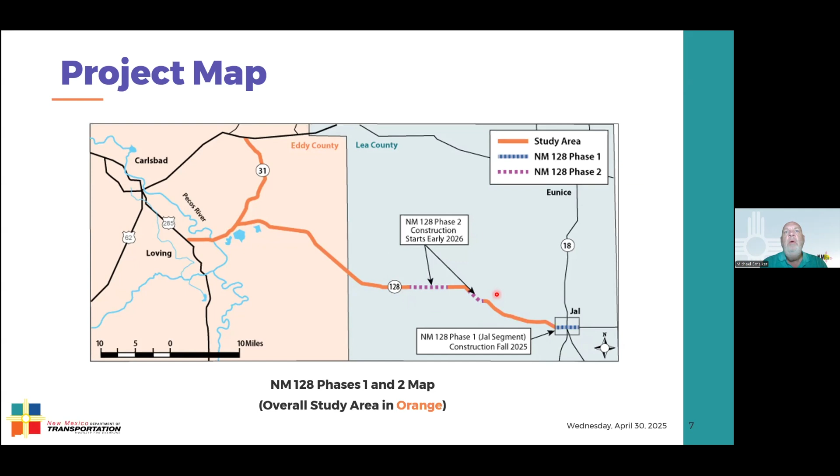We can go ahead and go to the next project, and these are going to be our future projects that we can talk about on the next page. So on the next map, as you can see in the middle there, it's kind of the teal blue color, we have New Mexico 128 Phase 3 design.

What we're doing here is we're going ahead and capturing the WIPP intersection, and we're actually capturing Orla and Buck Jackson. So we're actually going to build Orla and Buck Jackson, and tie that together with a divided highway and improve those intersections, because we know that Orla and Buck Jackson are probably a couple of your major intersections along the corridor.

What our goal is to do is finish up Phase 2, and then we're going to roll directly into construction for Phase 3 of these other intersections, so they're not all sitting up on top of each other.

The other project is not funded yet, but that's New Mexico 31, Phase 4. That one actually goes from milepost 0.5 to around milepost 8, at the New Mexico 31-128 intersection. That does not include the bridge over the Pecos, but right now that's anticipated to be a 4-lane divided highway for that portion there. So we're looking at that one as we get funding for it, but that one will be out in the outer years at this time because it's not currently funded.

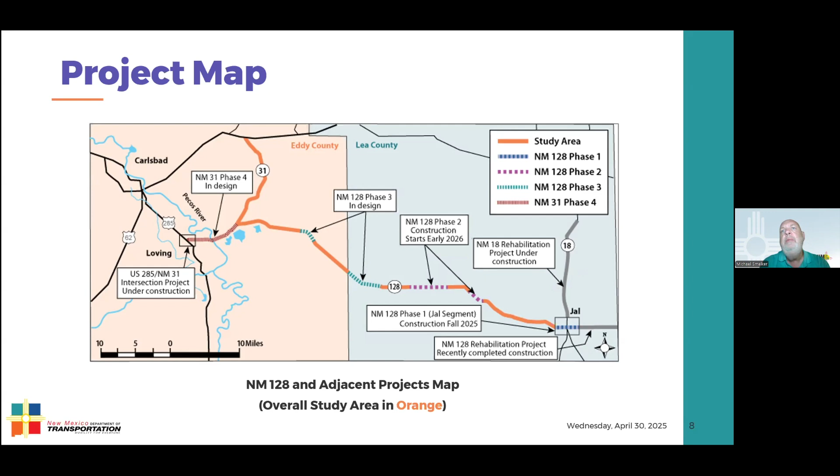Thank you, Michael, and good evening, everyone. My name is Andrew Sutliff. I'm a highway engineer and project manager with a firm called WSP, and our team has been working with NMDOT for the past few years on the NM 128 improvements projects.

So believe me when I say I understand it's been a long time coming, and we're really excited to be here with you tonight to give you this update and to say that, as Michael mentioned, these projects are going to construction very soon, these first couple phases.

So if you've been following the project, you might remember a couple years back we were on a meeting similar to this virtual public meeting tonight, and that was to review the study that was performed on the corridor. We did develop a study that evaluated some issues and recommendations, and I think it's worth going over those briefly before jumping into the first couple phases.

I do understand that it might not take an engineering study to see these big issues happening on the corridor. If you are on this meeting, you're likely driving through this highway, or maybe you know friends or neighbors that do.

And there are a lot of crashes happening. When we worked through the study, there was a 6-year period that we evaluated, and over 700 crashes were documented during that period through this project area. A lot of the types of crashes we found were head-on collisions, T-bones, overturns, and rear ends, all of which were resulting in over a quarter of them leading to deaths or serious injuries.

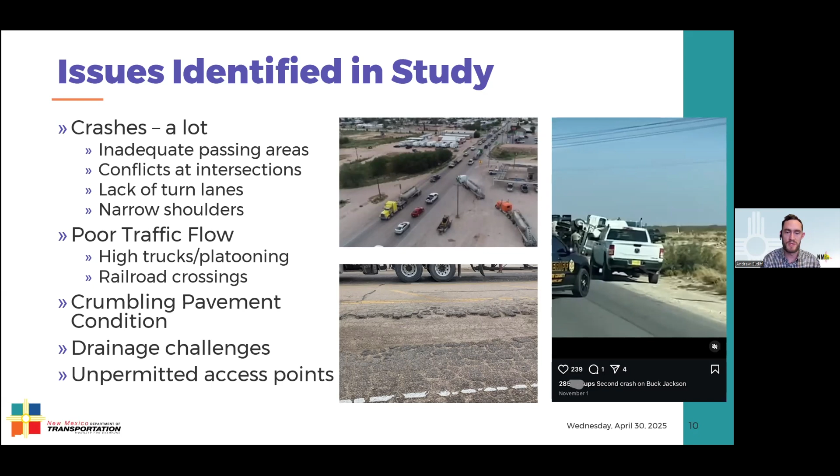Moving forward into the recommendations from the study: adding turn lanes with the proper length so that large vehicles traveling through this highway can safely slow down and make their turn. Also adding a median for separation of the eastbound and westbound travel directions, which is really important for a few reasons we'll touch on later. Also, of course, providing passing areas and additional capacity.

This might look different in certain intersections, or whether you're in the urban section of the city of Jal versus the more rural portions of the corridor. Michael mentioned that in some cases this is widening to a 4-lane divided highway facility, spreading out traffic to allow more space for safe turning maneuvers. Other recommendations from the study were to widen the outside shoulders, add rumble strips, and add lighting at major intersections, especially the conflict points.

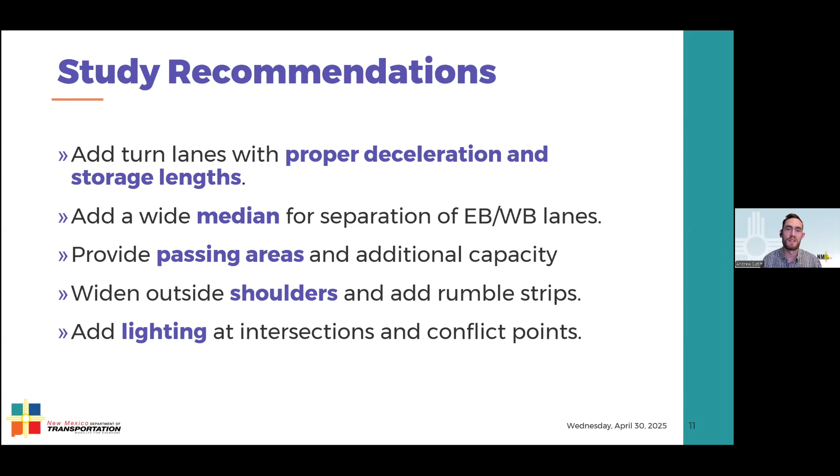It's also worth acknowledging that this highway is a major supply route for some key industries, not only for New Mexico but for the United States as a whole—one of those being oil and gas, but also potash production. NM128 is an alternate site route for the WIPP site, the Waste Isolation Pilot Plant. This gives context into the types of vehicles traveling through the highway, very large vehicles driven by perhaps your neighbors, friends, families, carrying valuable resources. We understand this is critical to provide safe and maintained highway facilities on NM128.

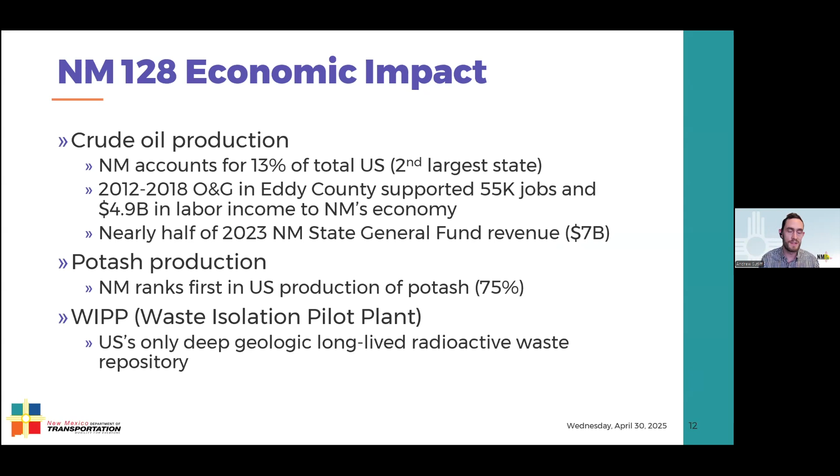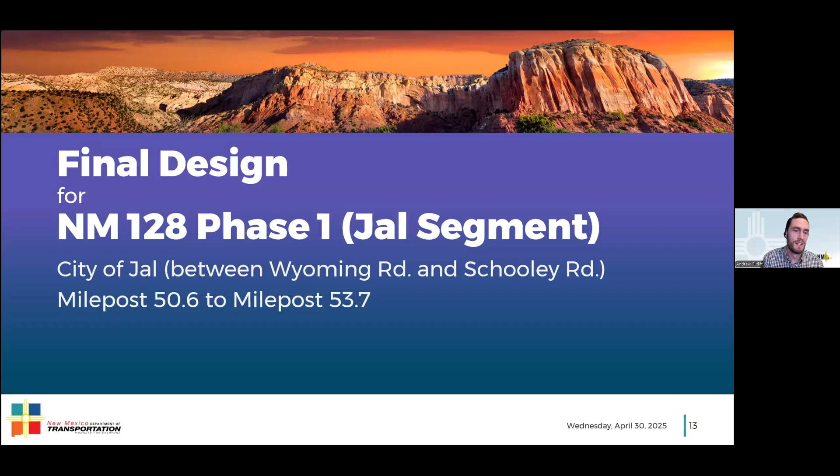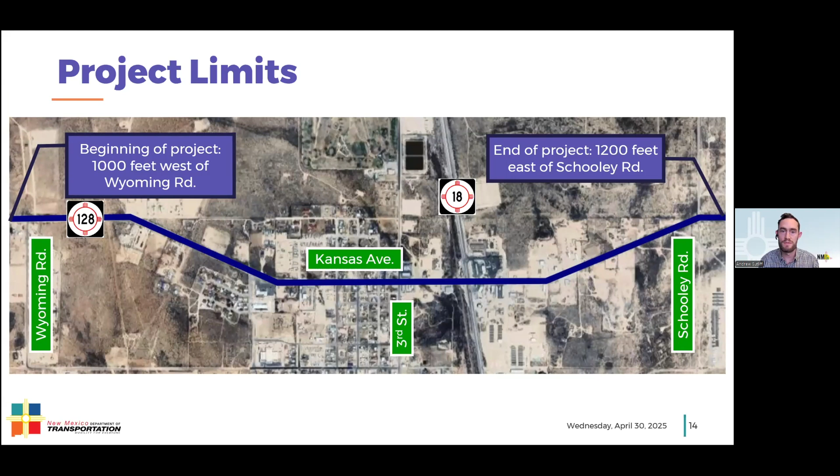That's a quick recap of some points from the study, but what we really want to move on to is the first two phases. Michael gave an overview of their status, but as a reminder, the first phase has completed design and is currently preparing to go out to bid in the coming few weeks. If there are any contractors on the line, please keep an eye out on NMDOT's bidding website for this project. It starts about 1,000 feet west of Wyoming Road and continues approximately 3 miles to the right side of the screen, 1,200 feet east of Schooley Road, through the city of Jal.

It doesn't show on the screen here, but we've added right turn lanes at key intersections and a widened section between 3rd Street and NM18 for left and right turn lanes. That's important because the project will be adding brand new traffic signals at the 3rd Street and NM18 intersections. Today it's just 4-way stops, and we believe those traffic signals, synced with each other, will make a significant difference ensuring smooth traffic flow through the city.

And cut down those travel times seen today. Some other improvements not shown on this image: there will be brand new street lighting throughout the project, sidewalks, and storm drain that will be installed. That storm drain will help collect any water ponding on the road, which we believe is contributing to the pavement crumbling over time. So we're going to get water off the road, and we'll have a brand new smooth pavement section.

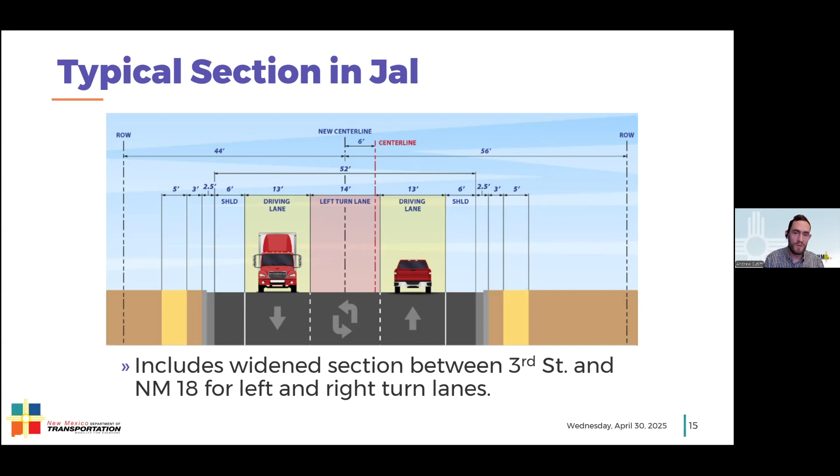Yeah, quite a bit of improvements in this project.

Something I'd like everyone to know is when the contractor comes on board, whoever the winning bidder is, there are requirements for them to come back to the public at the beginning of construction, and also whenever there are major phase changes or major pieces of work happening as part of the project. So you'll get notices, whether it's online on a website, radio, advertisements, or mailers. The contractor will be responsible for communicating construction progress. But we felt it was worth giving everyone a heads up on how this project may be constructed and where traffic will be anticipated to be.

So the first phase is shown on the screen, and this is where the contractor will build the north side of the roadway. Traffic will be shifted to the south side of the roadway, with one lane of eastbound and one lane of westbound throughout the duration of the project. This phase is really important because it's when the contractor will be constructing most of the new storm drain system, so we expect this may be the longest phase during the project.

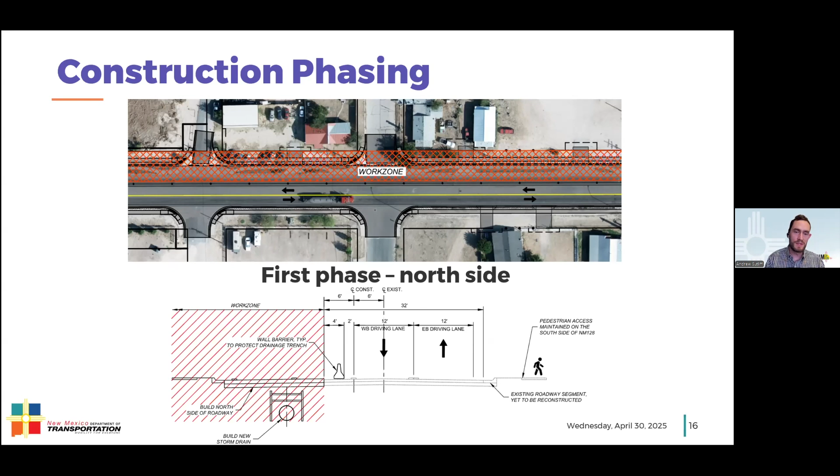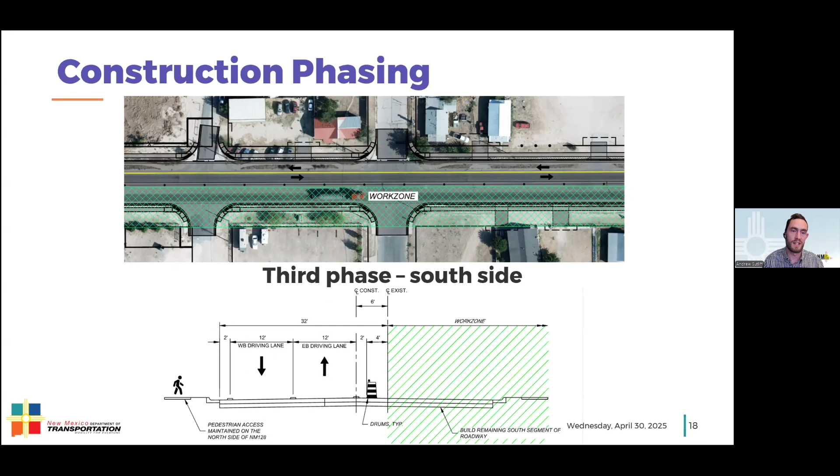Pedestrian access will be maintained on the existing sidewalks on the south side of the roadway. But as work progresses, you'll see on the next slide that the contractor will finish the north part of the road and move to the middle. That brand new pavement on the north side will be used for westbound traffic. Continuing to the next slide, the last phase is that the contractor will work on the south side of the road, and both lanes of traffic will be on the brand new pavement that has just been completed on the north side.

So something that may or may not have been apparent: since we are maintaining one lane of traffic each direction, the left turn lanes will be restricted except at these intersections: Schooley Road, NM18, 3rd Street, and Wyoming Road. This is really important, and it's not taken lightly.

As you can see, this picture on the right is an example of what that storm drain and general construction will look like. It requires a lot of space so the contractor can work safely and efficiently to construct this project quickly and safely, and also to keep construction equipment a safe distance from passing vehicles.

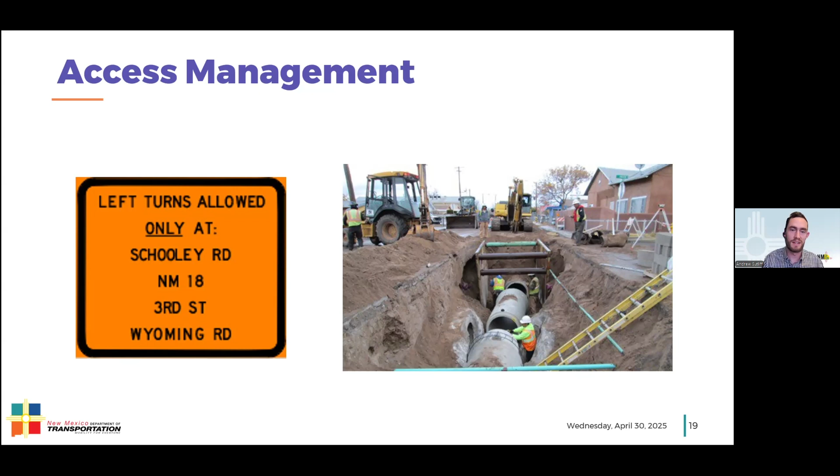Also, by being strategic about where these left turns are happening, it can cut down on backups. If someone stops in the middle of the road to try to make a left turn, it backs up traffic for everyone else. This was presented during the study phase, but it's worth the reminder that you might have to plan a slightly different route if needed. The contractor will make these turning movements signed very clearly, so you'll be able to see where you can and can't turn.

And again, they will let you know ahead of time when this happens. The next slide shows another piece we wanted to give a heads up about: there will be a portion during construction where the railroad tracks that cross NM128, just near the NM18 intersection, need to be reconstructed. In order to do that quickly and efficiently, that will include a complete but temporary closure of NM128 at the tracks. We're expecting this to take in the range of 3 to 5 days, and again this will be shared with the public prior to the railroad construction and closure.

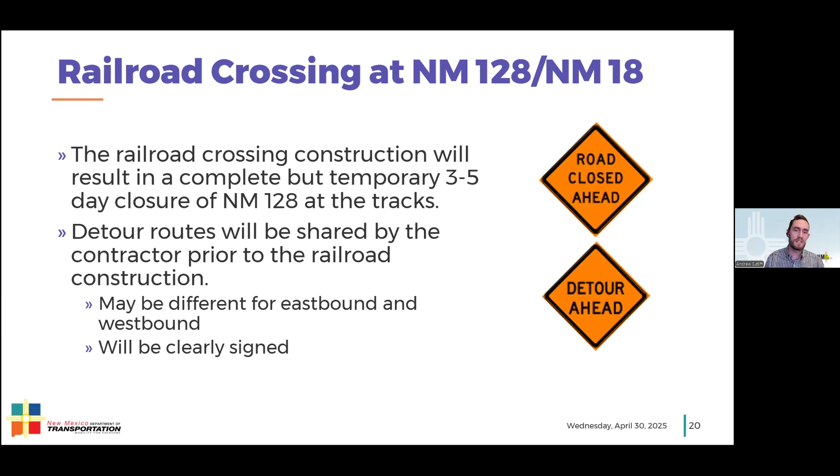The detour routing will be clearly signed, but it may look something similar to what's shown on the next slide, which is for eastbound traffic. That will be diverted up north on 3rd Street, past the Country Club, and then back down on NM18. Westbound traffic would be diverted a slightly different route: south on NM18, over to Merryman, and through the city streets to get back to NM128.

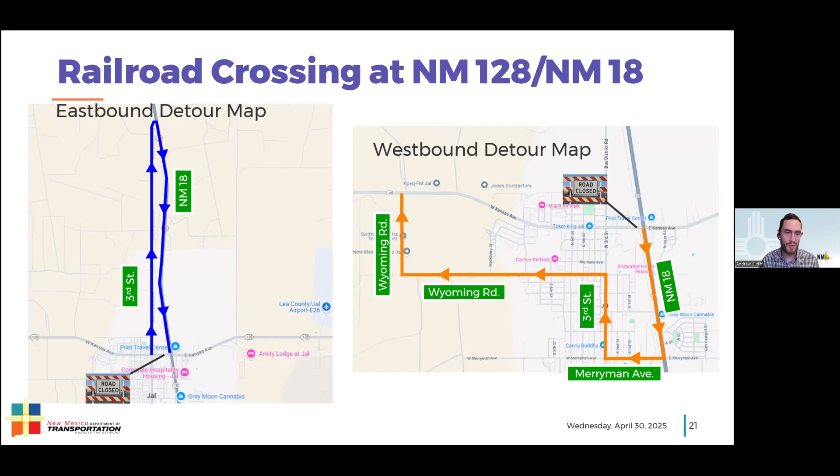And again, this is all to ensure that the contractor can build efficiently, and it's all about getting this project done as quickly as it can be, so that you can appreciate the benefits of the improvements that are being installed.

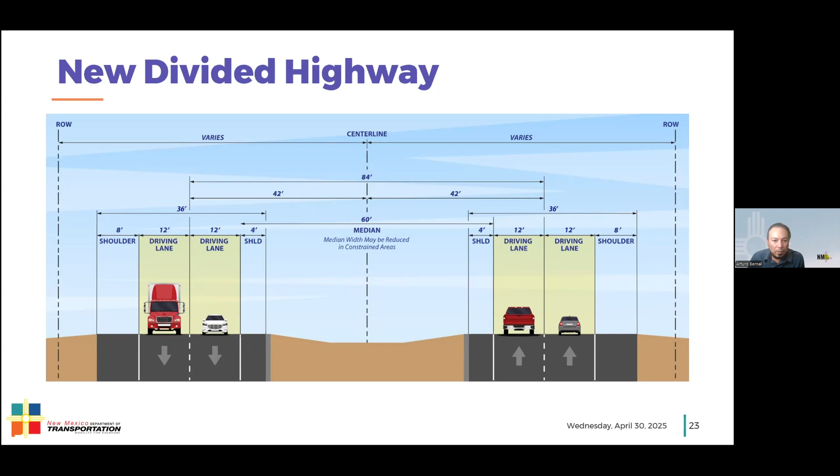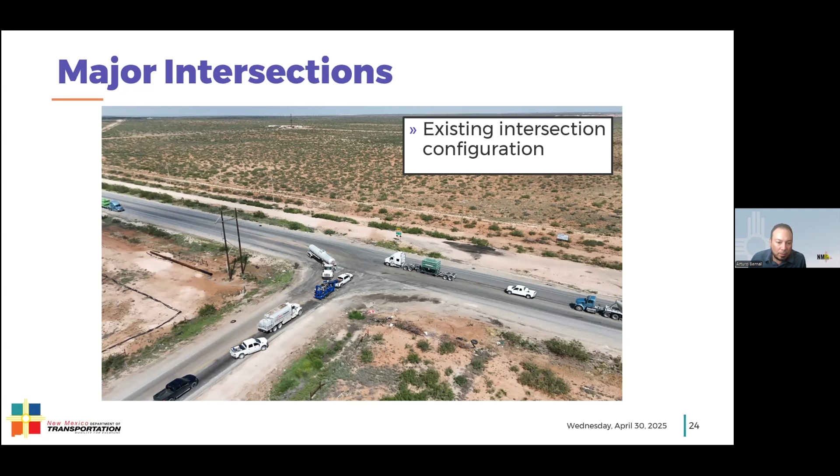During the study phase, several intersection option treatments were analyzed, ultimately settling on the high T configuration shown on the next slide.

This is a graphical rendering of what the high T intersection will look like once completed. The high T was chosen because it does keep traffic moving on the main line while providing left and right turn deceleration lanes onto intersecting roads.

The left turn lane onto New Mexico 128 is made safer by allowing vehicles to focus on one side of the highway at a time. And it also has an added acceleration lane that will allow you to safely merge with mainline traffic.

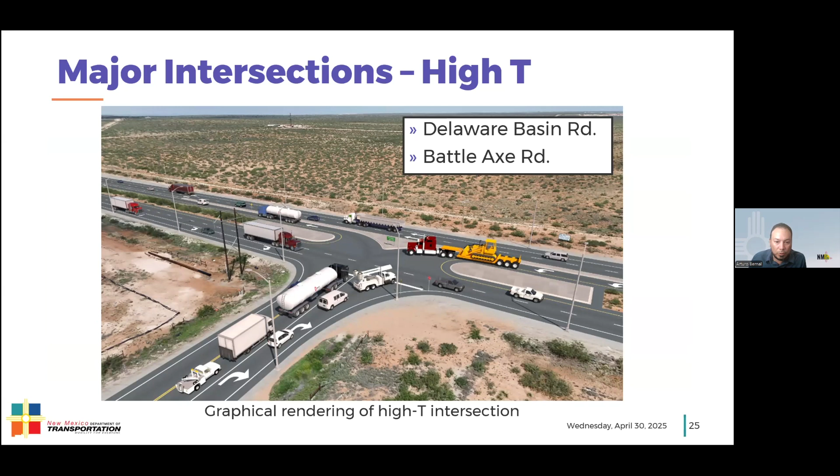This intersection, or all the intersections, will be lit as well as any merge points. At this time, traffic signals were not warranted, so they are not included in this project, but this intersection configuration does allow for future signalization when warranted.

The other intersection is the full access intersection at Brininstool and Diamond. As you can see on the screen, the existing alignment was offset between Brininstool and Diamond. In coordination with Lea County, we are able to realign the Brininstool road better with Diamond to provide a full access intersection.

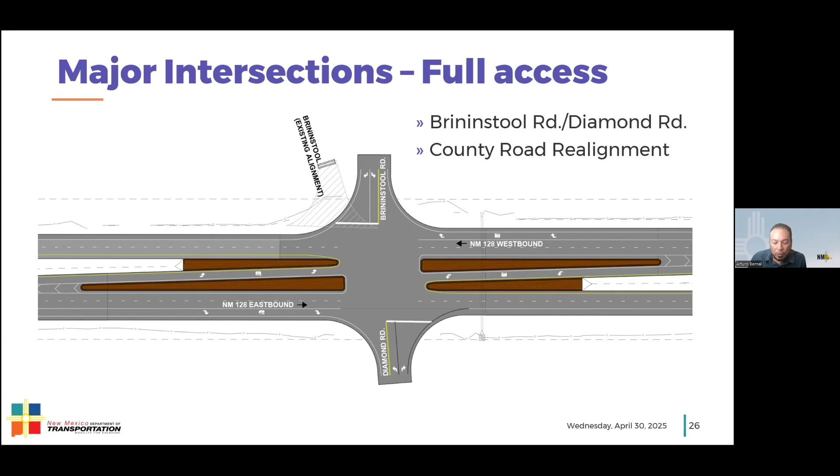Along with this, we are including tapered left turn deceleration lanes to provide positive offset and adequate sight distance for those turning movements. Right turn deceleration lanes, and this one will also have lighting throughout the intersection. Similar to the high T's, this configuration can be signalized when warranted.

On the minor intersections, the minor turnouts will be paved, but you can see on the screen we will have an additional base course shoulder that will allow for larger vehicle off-tracking if needed, given the traffic vehicles that are typically out there.

On U-turns, given that it is a divided highway, we are strategically placing U-turns about 1 mile to 1.5 miles apart. This will take about 60 seconds to travel at the posted speed of 55 miles an hour, so total of 2 minutes in both directions.

Please keep in mind the enhanced safety of making this turn and only having to worry about one side of traffic at a time is worth the 2 extra minutes of your commute.

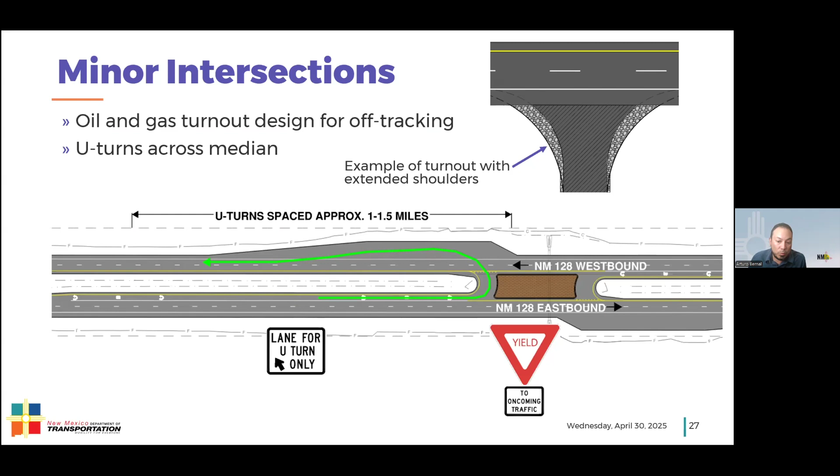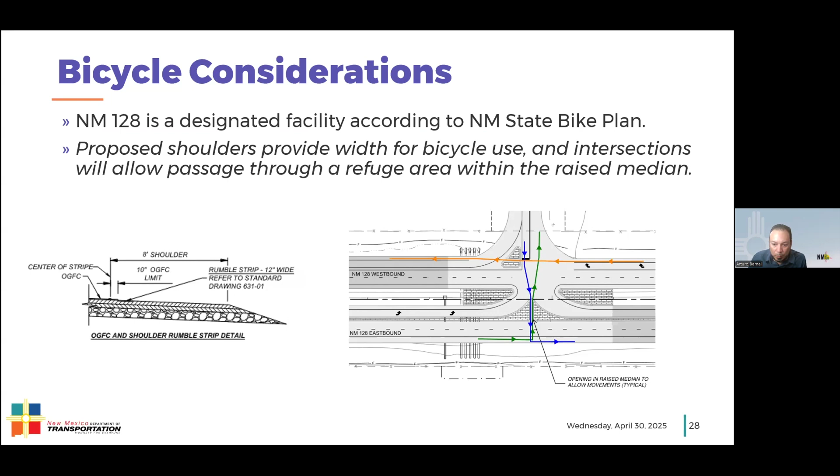So bicycle considerations: the NMDOT's bike plan has designated NM 128 as a bike facility due to its long east-west reaches, and Lea County has been designated on the NMDOT's Vulnerable Roadway User Safety Assessment as demonstrating a high need for safety. The design team was able to accommodate bicycle facilities utilizing the 8-foot shoulders and adding refuge areas to the raised median, as you can see on the screen, without any special design changes or added cost to the project.

On pavement, we are utilizing full depth reclamation on the existing lanes throughout the corridor. This is a faster, more efficient method of construction as it utilizes the existing pavement and base course to create a new base. We are then coming back and placing a 6-inch HMA pavement over the FDR section after it's been treated and compacted.

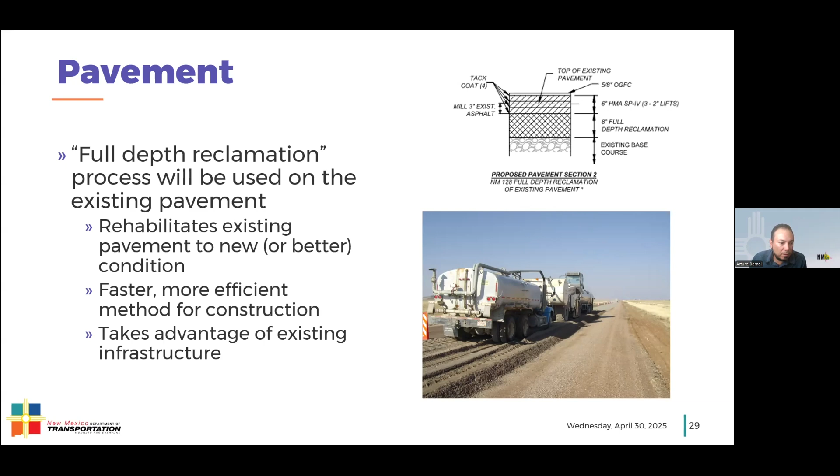Major intersections will be coordinated with each other and other NMDOT construction projects so that disruptions and detours are minimized throughout. The next phase, the second construction phase, will shift traffic onto the newly constructed road and maintain eastbound, westbound movements on that section while the contractor goes back and reconstructs the existing lanes.

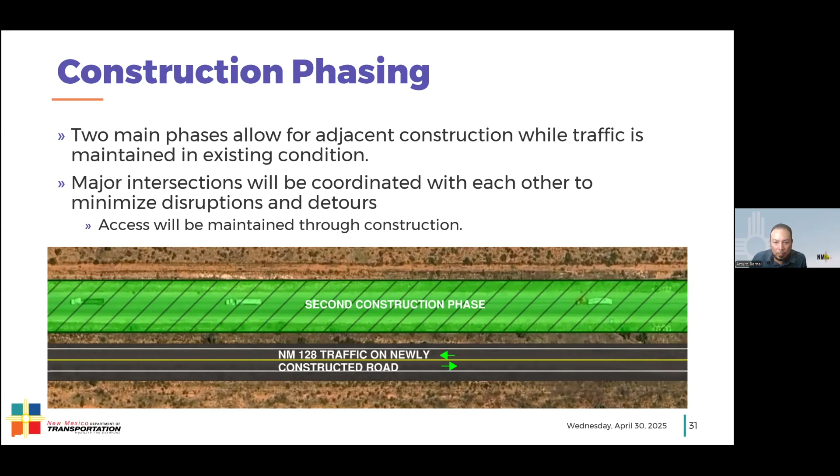On utilities, we have been coordinating with the utility companies throughout the design, and we will continue to do so. Coordination is definitely crucial to avoid any costly delays.

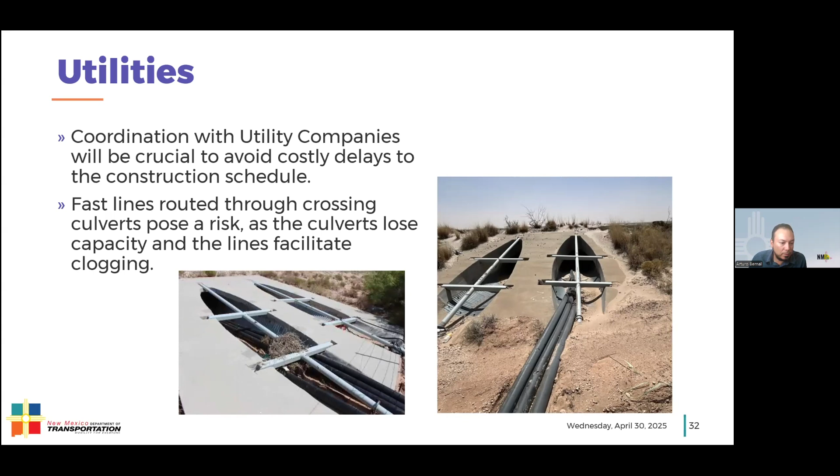So on to schedule and next steps. You can go to the next slide.

Going back to the phase 1 and phase 2 map. Phase 1, the Jal segment, is slated for construction in fall of 2025, with phase 2 starting in early 2026. Again, these two will be coordinated with each other to minimize impacts to the communities.

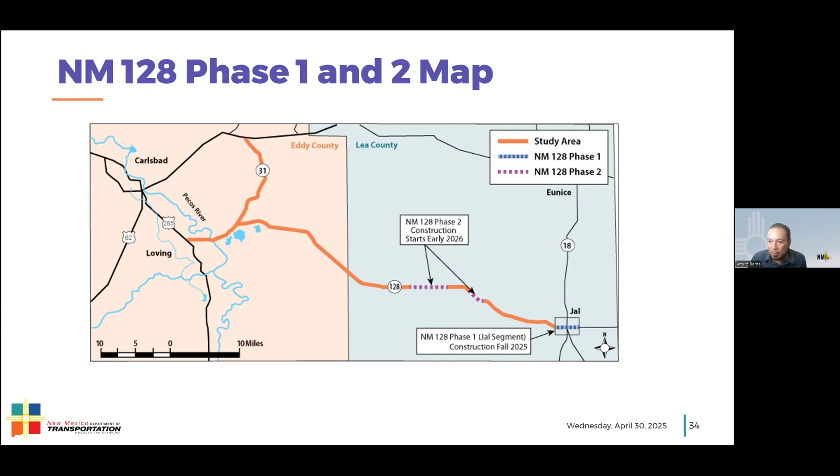Next slide. So again, phase 1 bids are due June of this year, with phase 1 construction starting fall of 2025. Phase 2 design plans will be completed summer 2025, with phase 2 construction anticipated to start early 2026.

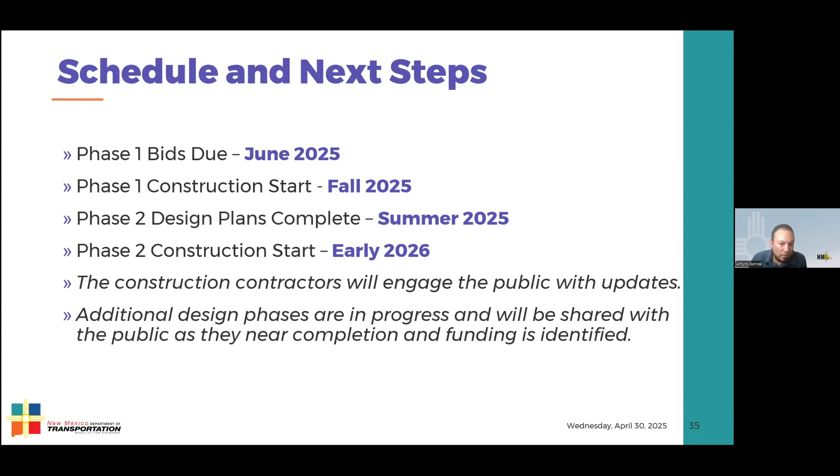The construction contractors will engage the public with updates. Additional design phases are in progress and will be shared with the public as they near completion and funding is identified. And I'll pass it on to Nick Fazio on how to comment.

Thanks, Arturo. So as we mentioned earlier in the presentation, we do want your input. We want to know what questions you have, and if you have any comments on topics such as the construction phasing, access, or the improvements themselves, we want to know about them.